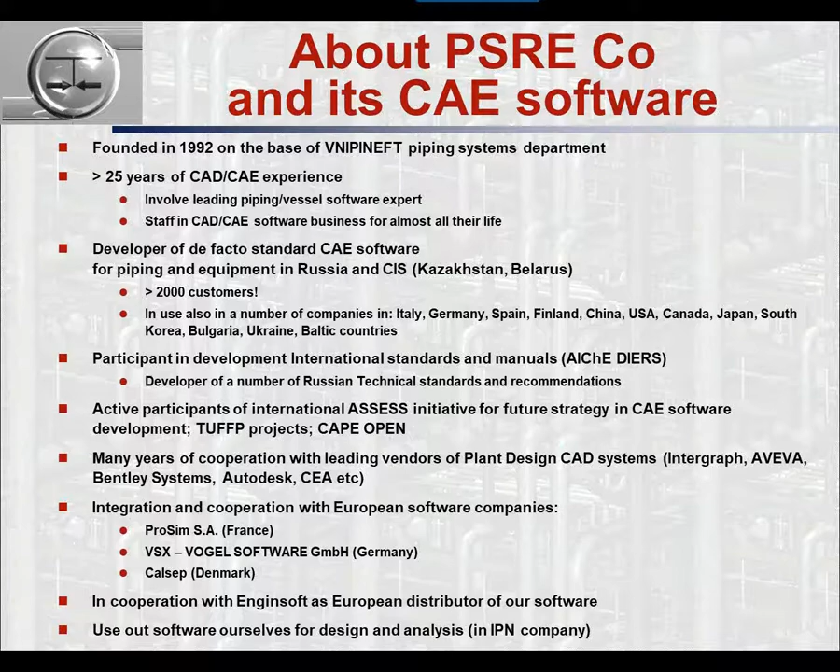But our main product is the piping analysis and sizing suite of software, which contains several different programs or families of programs. It's piping flow analysis, pressure relief system analysis, piping and equipment stress analysis, and thermal insulation design and analysis.

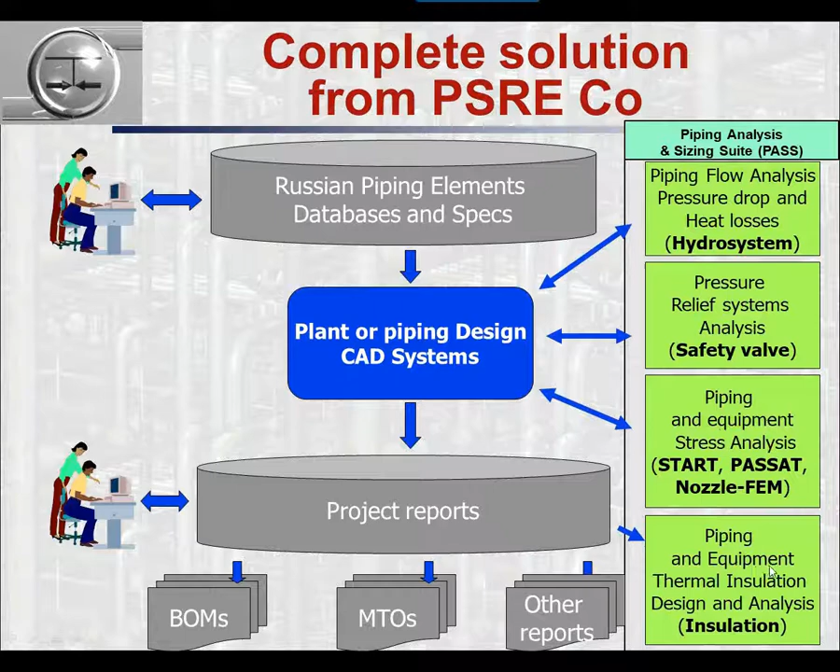So the potential users of this software are in different markets, but most of them are in the plant design industry with different plant design: oil, gas, refinery, petrochemical, chemical, different kinds of power industry, metallurgy, food, and so on. They are used by EPC companies in their design departments, or owner-operator companies, again in their design departments. Practically all of our software is used in this part of the market. And in fact, this is a standard choice for Russia and some other countries.

It also can be used for expert review of industrial safety, these stress analysis programs, and equipment manufacturers use our stress analysis software for vessels and nozzles.

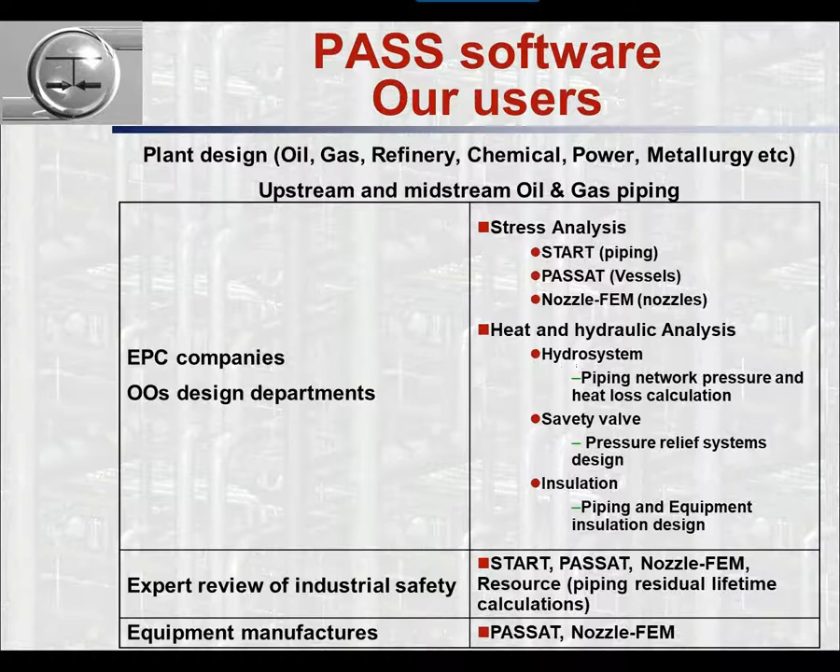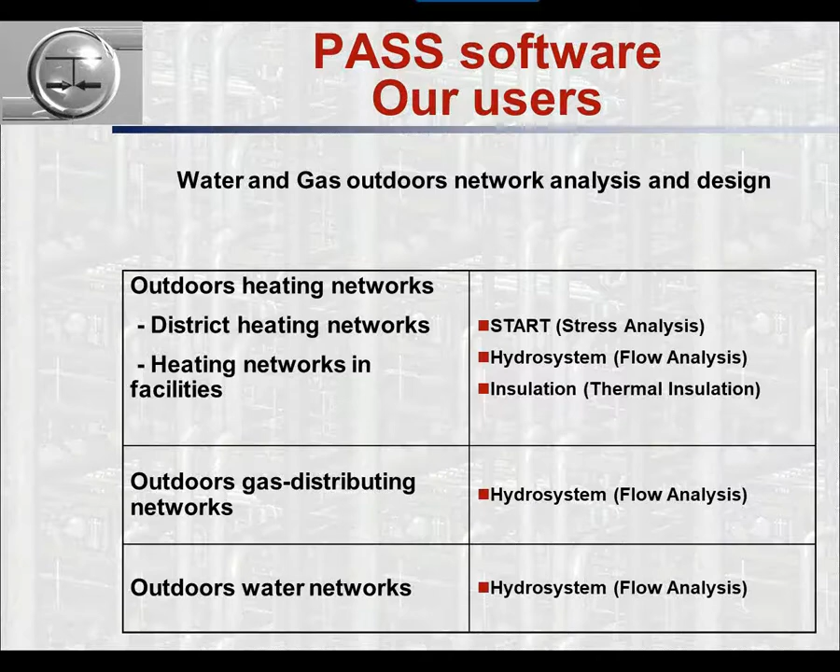And also another interesting segment for us is different outdoor networks. For water networks, gas networks, and for example, we have a very good suite of software for district heating networks. And our stress analysis software, in fact, is widely used now for district heating network analysis, not only in Russia, but in China. And so we are looking to see if we can help in this field for you. And also we can do flow analysis for gas distribution networks and water distribution networks.

So another interesting part is that this is not just different separate pieces of software, but they are integrated with each other. So we can transfer data from one program to another program, and sometimes in two directions. And there are a lot of different connections, different interfaces between our software and different graphical systems or different partner systems. So if you design your piping, for example, you can probably quite easily transfer your data to our software. And we hope also to have some integration with modeFRONTIER.

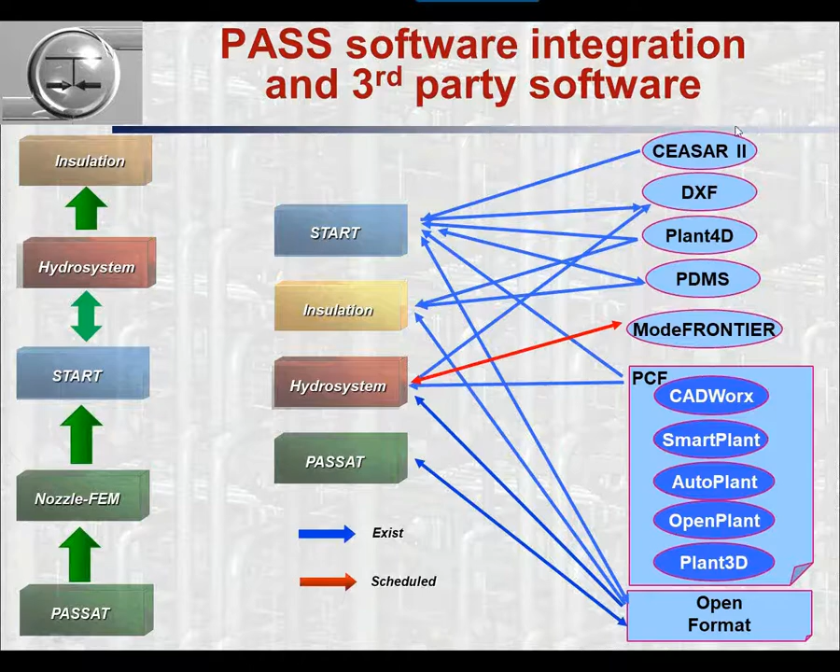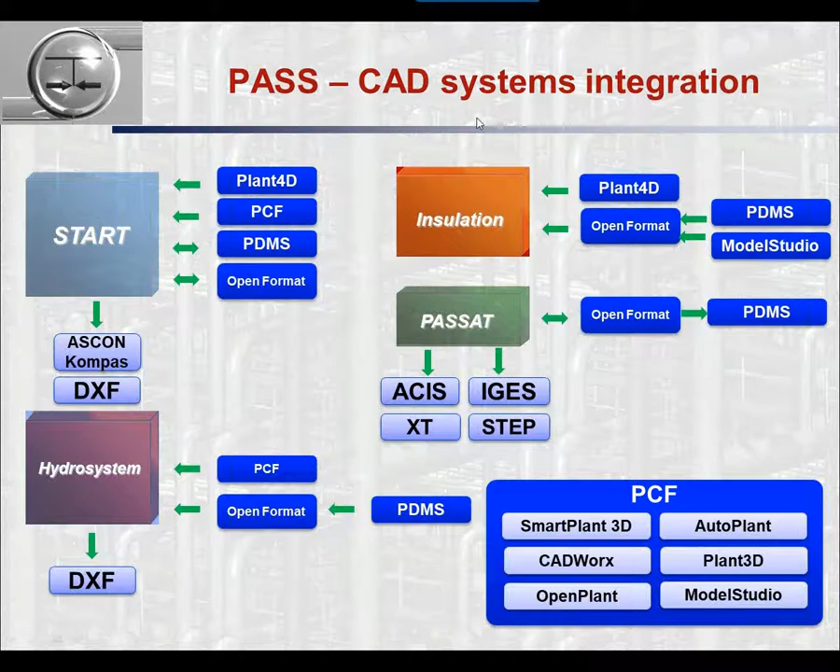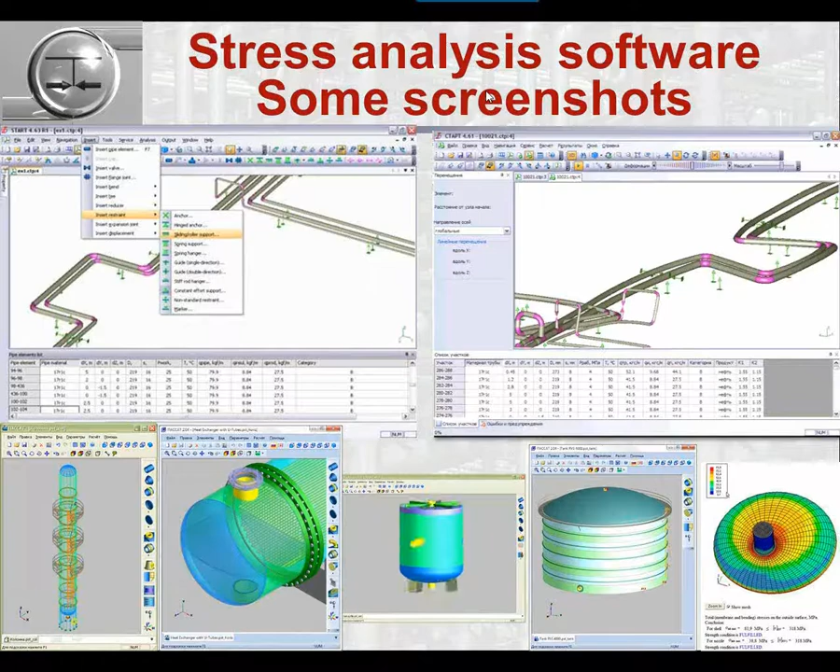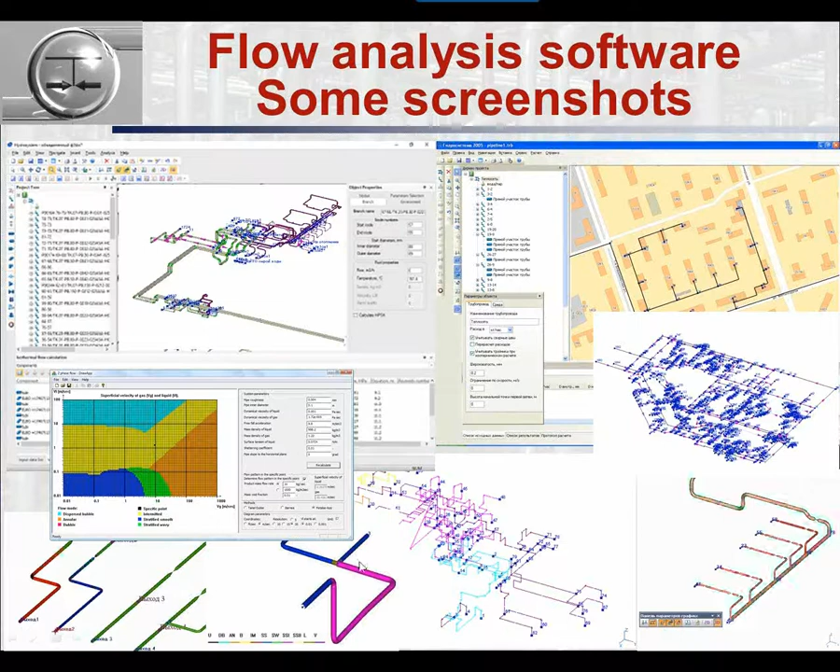And these are some screenshots from our flow analysis software. So this is how the model looks. You can have a 3D model, you can have a complex network, you can have a network on the map, you can make some topology analysis, you can look at your results in a color map, and you can do water hammer and look at how the waves are going. And here you can see different flow patterns for gas-liquid two-phase flow, and even for severe slugging.

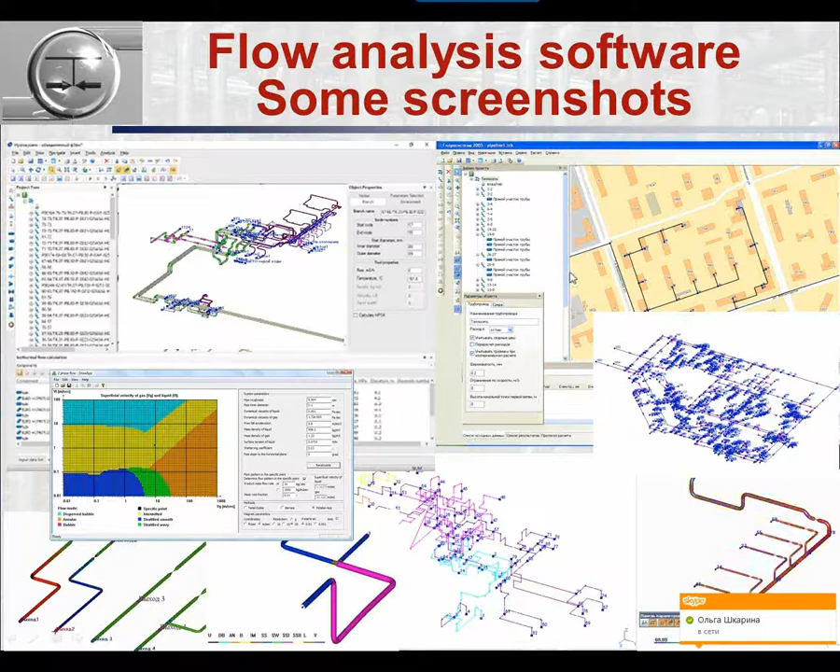So just to summarize shortly, what are the potential competitive advantages? Why choose PASS? First, it's a very powerful calculation engine at the core of a very easy-to-use GUI.

Sorry, just a moment.

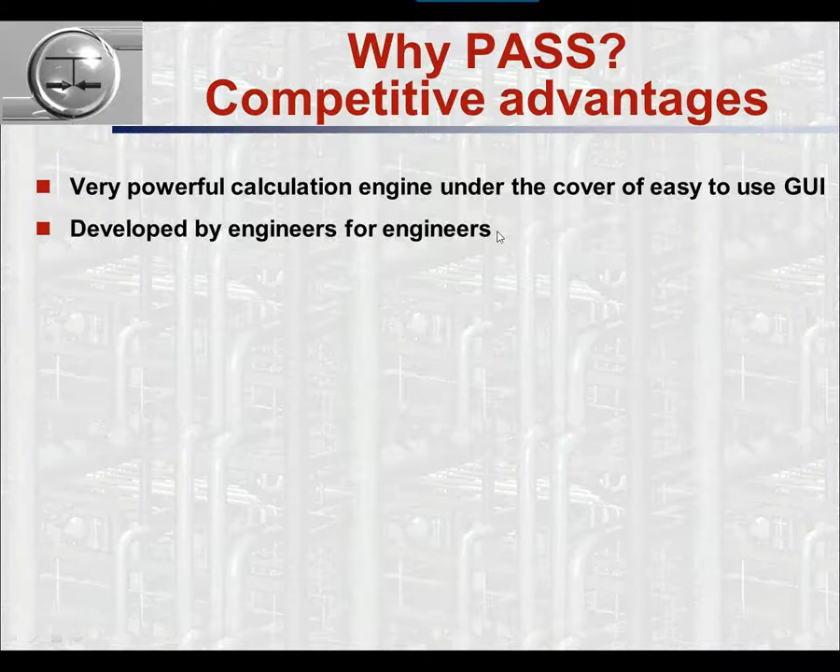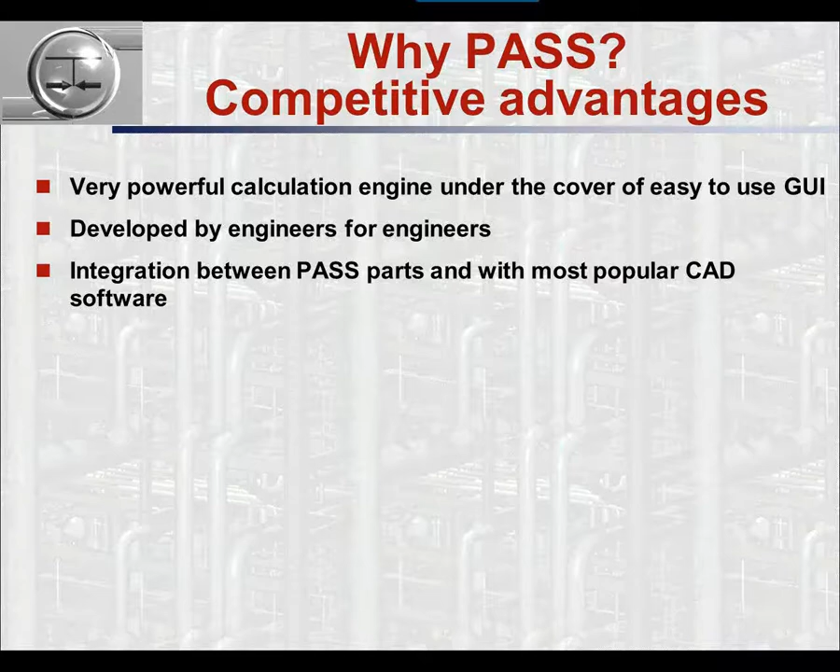Sorry. So, a very powerful calculation engine, and it was developed, as we say, by engineers for engineers. So we always keep in mind that the software should talk with the user in his language. So it is very easy for just an ordinary engineer to use our software. And we put a lot of effort into integration between the different parts of our software and its integration with the most popular graphical and design software.

And it's the de facto standard in Russia. So if you have any projects for the Russian market, our software is the number one to select, because it complies with all Russian standards and codes, so you will not have any problems. But we also comply with international standard practice like ASME, European, DIERS, and others. And more codes are in work. So we hope that all our software at the end of this year or the beginning of next year will be compliant with all main codes, ASME and European. And some of it is already compliant.

High quality direct technical support. So you know that some companies just push their support to some countries, not by vendors, not by developers themselves, but this is not for us. We ourselves provide direct technical support, and our developers and our quality assurance engineers also provide the support for all end users. And we're putting a lot of effort into it to provide quick and quality support.

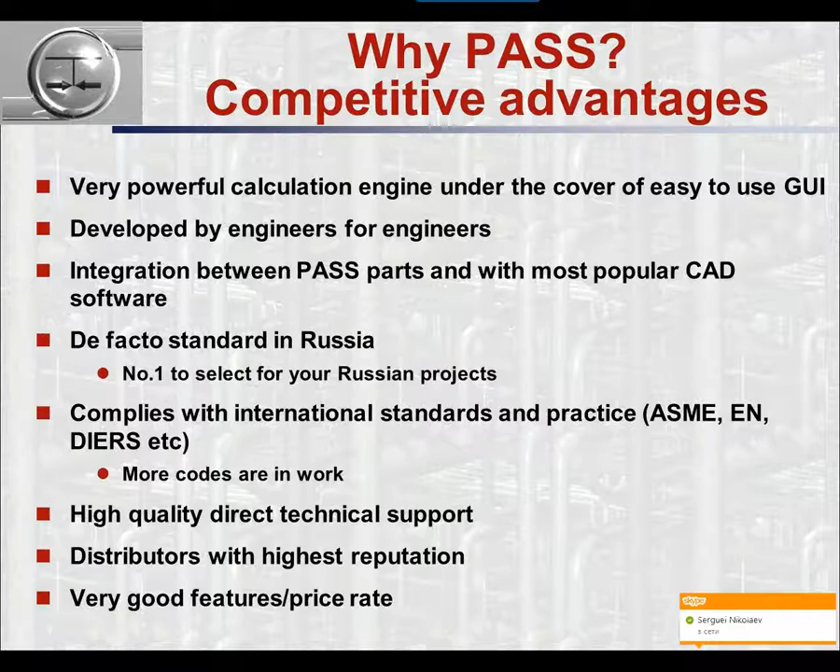And of course, distributors are very important, and we only have distributors with the highest reputation, like EnginSoft. And last but not least, a very good features-to-price ratio, and flexible licensing, so you can get all that you would like for just reasonable prices.